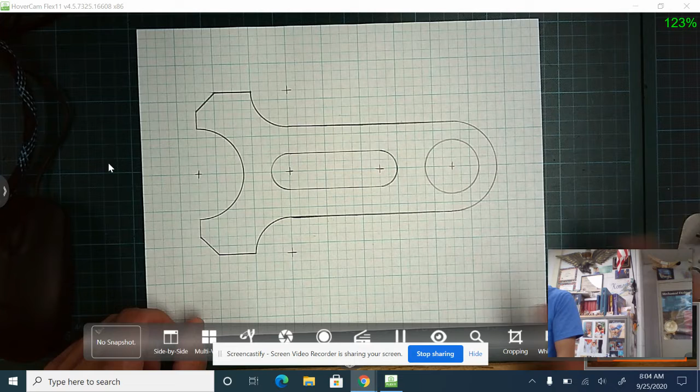Okay, everyone, you can see I have now gone over the part with the gold pencil, so I'm ready to start putting the center lines on and then the dimensions. After you go over with gold pencil, make sure everything's cleaned up. It looks nice, overall this is pretty good. I maybe went over this a little bit too thick here, you can see it's a little bit darker, so I could use my eraser shield and just maybe erase a little off of that. Nothing crazy, but overall we're looking pretty good.

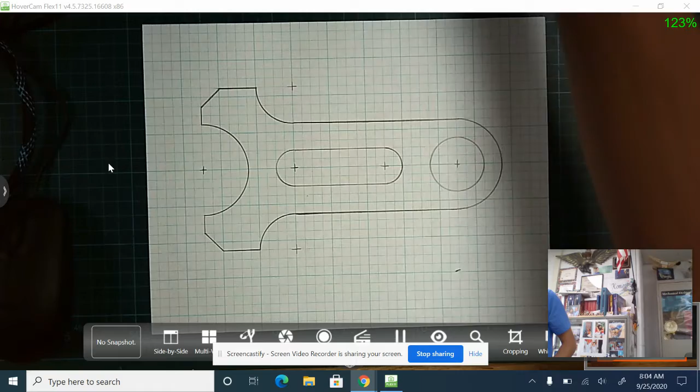Center lines, you're going to use the blue pencil. I'm going to start with the horizontal one. And remember, a center line has dashes in it. It's going to look like this: solid line, little space, and then a little dash.

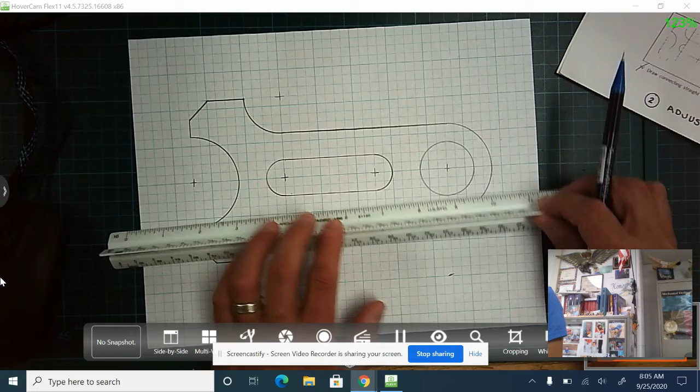So I'll start with the horizontal one. I have all my center marks already in there. It's a blue pencil, I'm not going to connect to the center mark, so leave a little bit of space. And it's kind of up to you where you're going to put the center marks. I'll put one maybe right here, so I'll leave a little center mark there.

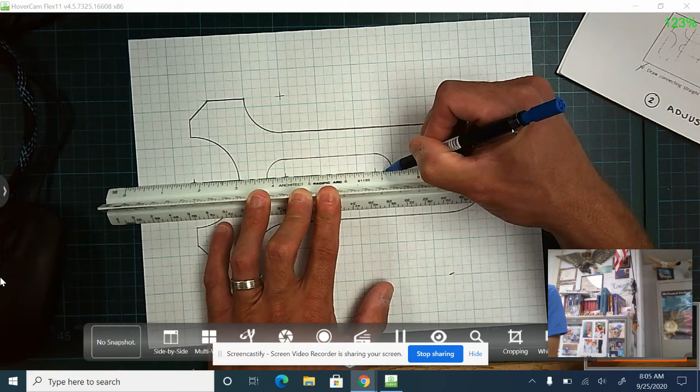Again, don't connect to the center mark. I'm going to put one right here in the middle, and then maybe I'll put one right here. Then I got to move over here a little bit. Next, I'll just go out a half inch, I won't even put one on that side. So there's my center line, I left a few dashes in there.

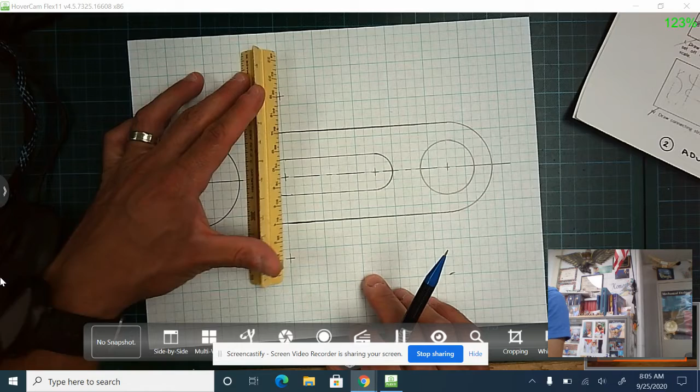Now I got to do the vertical ones. Let's see, I'll put one maybe right here, and then just be consistent. So if you put one here, let's put one on there as well on the bottom, so it's symmetrical. I'll do the same thing here.

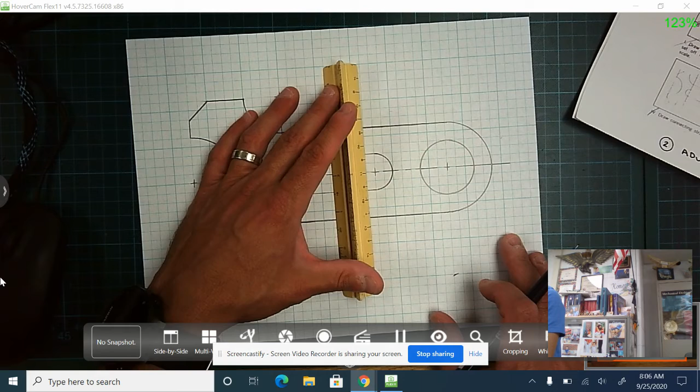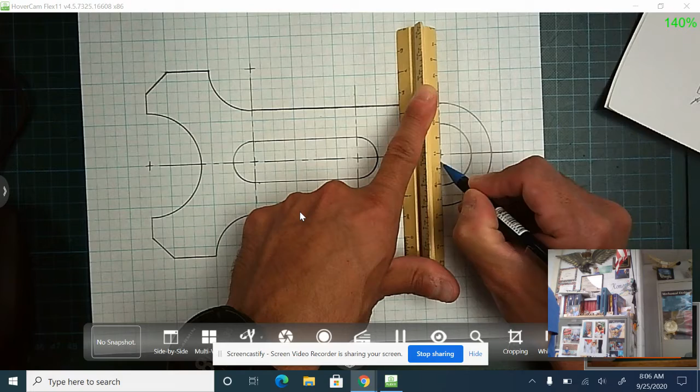Now here I'll go about a half inch outside, center mark right there. Center mark right there, and then a half inch down, a little bit bigger. And then another one over here, so again I'll go a half inch outside. Center mark there, and go down. Center mark right here, and then go down a half inch.

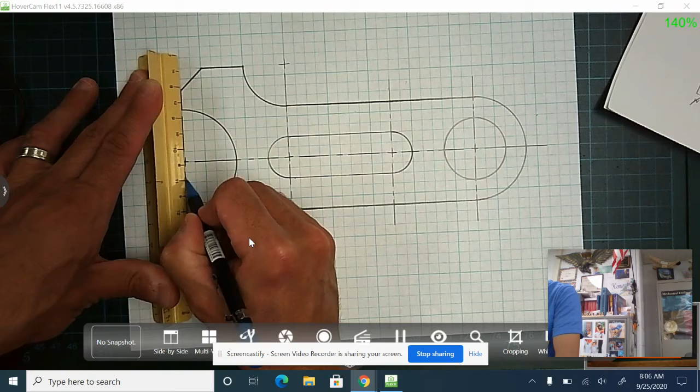Also, I need to fill in these little areas, so I'll do one here, and I won't leave the dashes in there. Don't connect to the corner, leave a little bit of space, and also don't connect to the center mark. So kind of like that, just two lines. And over here, I'll just do one right here in this corner, like that.

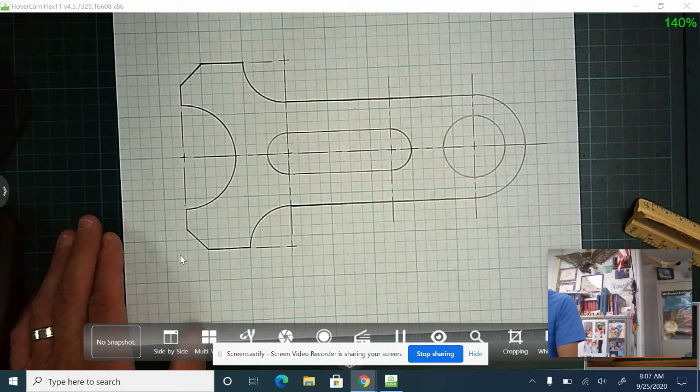And like that. Okay, now that we have the center lines in, we're ready to start dimensioning this. And remember the dimensioning rules: you want to start 3/8 away from a part, and you also want to letter everything 1/8 of an inch.

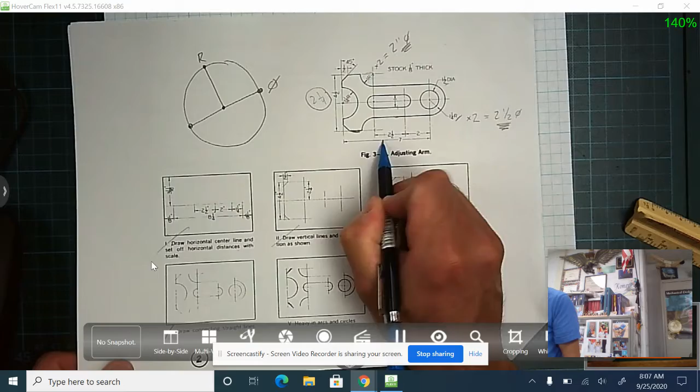All right, so I'm going to start with the 2.5, the 2, and the 7 on the bottom. Again, you're trying to replicate this. So we want to go 3/8 down from right here because that's the bottom of our part, not 3/8 from up here. So 3/8 from there, and then we're going to go another 3/8 for the 7. So that means I have the 2 here, the 2.5 here, and that would be considered the bottom of my part.

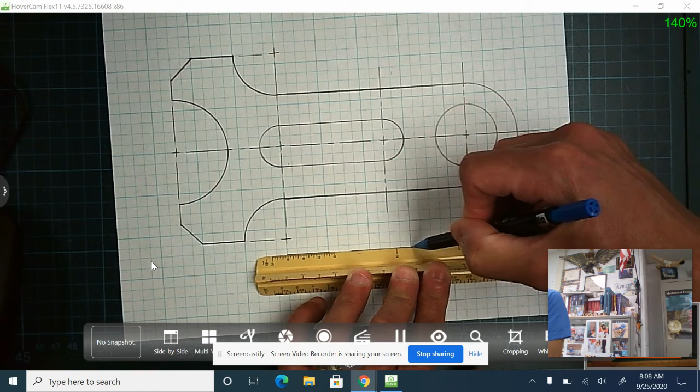So now I need to go down a grid and a half of the next one, and I'm going to draw in my two dimension lines here. So there'll be one here, leave a space in the middle so you can write the dimension, and then one right there. So those will be my two dimension lines.

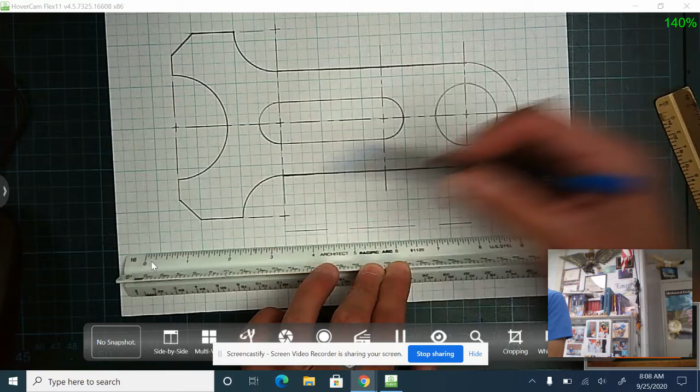Now I have to bring the extension lines down here as well, but I'm going to do the 7 first. So for the 7-inch dimension line, we're going to go down another grid and a half, so that puts me down to here. Now that dimension goes from the center of this hole to the left edge of the part, so the dimension line will start here, leave a space somewhere in the middle, and it will end right there. Okay, so here's my dimension lines.

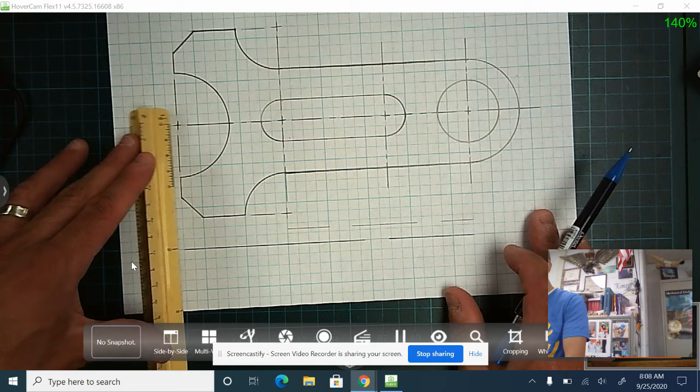Now notice the center lines are there, but we need to add the extension line coming down, also from the corner. So we're going to, don't connect to the corner, leave a space, bring it down. Same thing here, now this one will be really small, you don't want to connect it to the center mark either, so leave a little space, go down. So that's kind of a smaller one, and remember the space that you leave or you take out, you add it to the end.

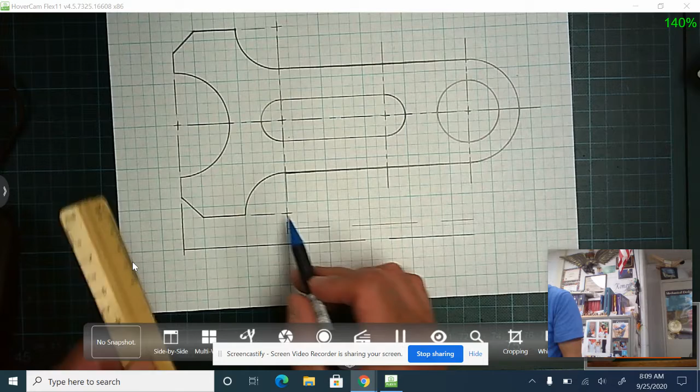Now here, it's okay to connect it to the center mark, so we can actually just extend this line. So this center line is going to kind of blend in and go right into the extension line.

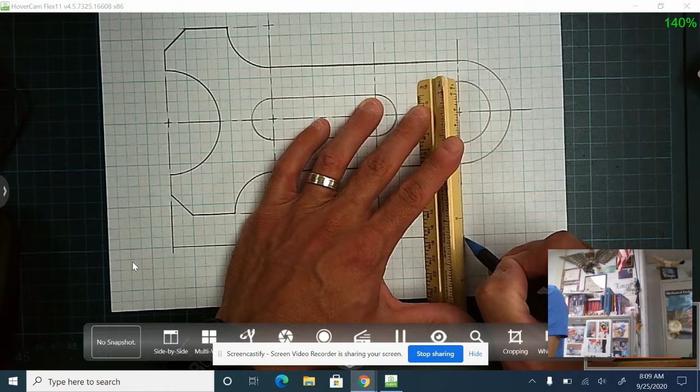Go a little bit past. And then the last one, same thing here. You can connect it to that center line and bring it down a little bit past. Now I can write my dimensions in there.

So this one's going to say 2.5. This one's going to say 2. And this one's going to say 7. Don't forget the arrows. Always double check you got all the arrows on there.

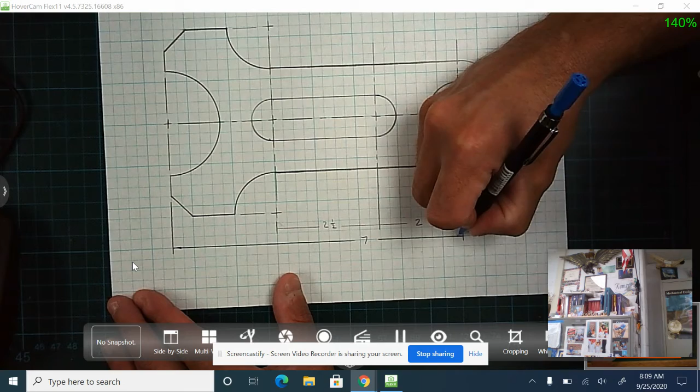Again, back and forth just a few times. Make sure you fill them in. They don't need to be really big or anything.

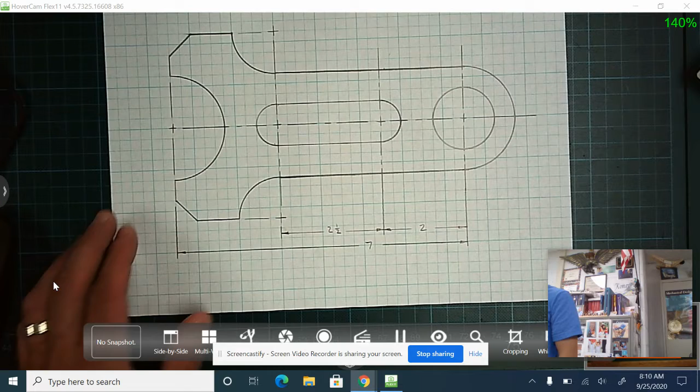All right, so we got our dimensions down there on the bottom. Let's see, we'll do the 1/2 inch, maybe in the 45 up top. So let's do this. We're going to go here.

First, the 1/2 inch dimension is going to go right here, but that dimension line is going to be really short because we still need to leave a little space in the middle. It's really going to just be like that.

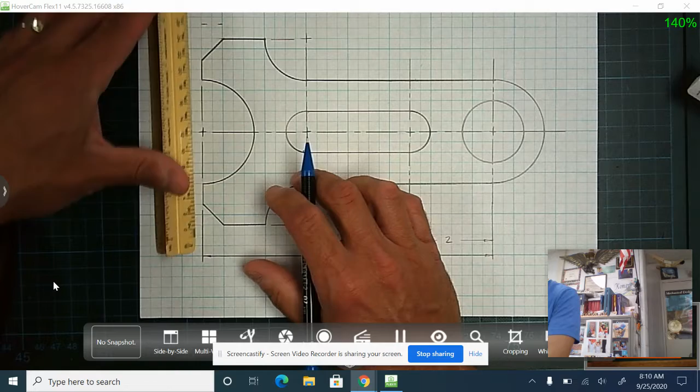Now here I can go, again, don't connect to the corner, go up. Here, don't connect to the corner, just go up a little bit. I'm going to write a 1/2 inch.

And then the arrows, you can even do the arrows on the outside. There's really not going to be enough room here. You can see how the arrows are on the outside there. So that's okay too. We can do this.

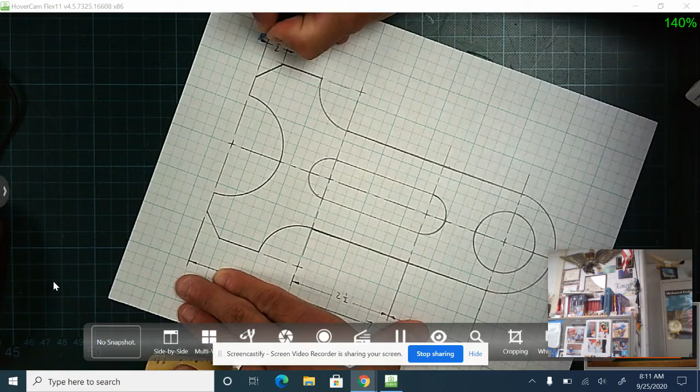So there's my 1/2 inch dimension. And the 45, I'm going to go out this way.

And then from here, I'm going to extend that extension line a little bit further. Maybe a little bit further than that. Okay.

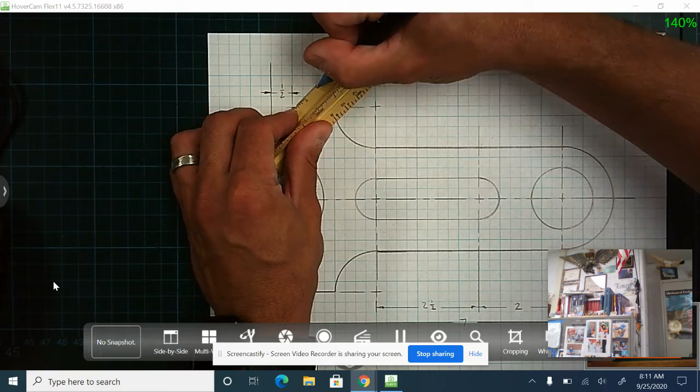I'm going to take one of my circle templates like we did with the last drawing. Yeah, that one looks pretty good. I'm going to use this one. I'm going to leave a space in the middle. Draw the curve, and then I can write in there 45 degrees.

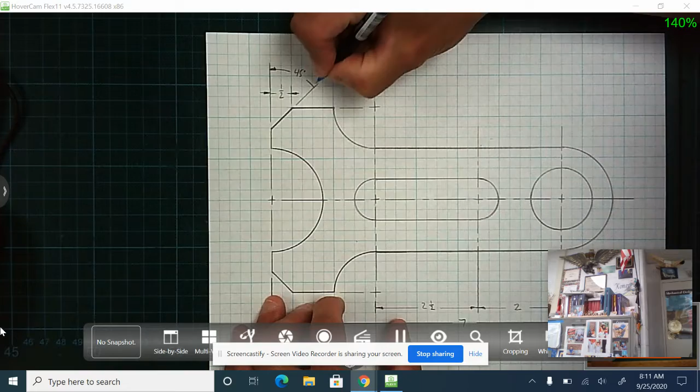All right, so if I was doing, I'm not going to do all of these this time. Like the 4.5 would go on this side. You'd go 3/8 over and do the 4.5 dimension over there. There's a 1 inch dimension here in the middle.

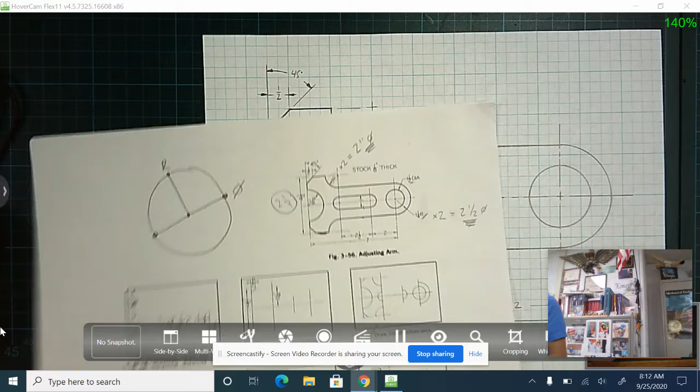I do want to do a couple leader dimensions just because those we haven't done yet. So like if I was doing, I'll do this 1.25 inches and this 1.5 inches. Those are pointing to the circle and the curve.

Those you want to go roughly at about a 45-degree angle. You're going to start at the center mark. You're going to go out, again, roughly 45 degrees. You can kind of eyeball that. And then you're going to go over horizontally just a little bit.

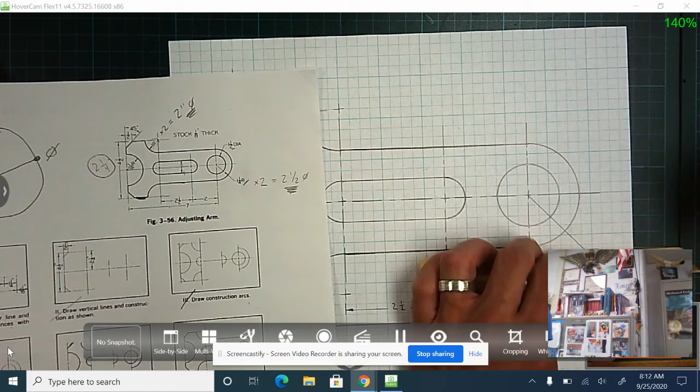Here we can write our dimension in here. It's 1.25 inches radius. And then just pay close attention to where the arrow is pointing. The radius is for this outside curve, so we want the arrow to point on the outside curve.

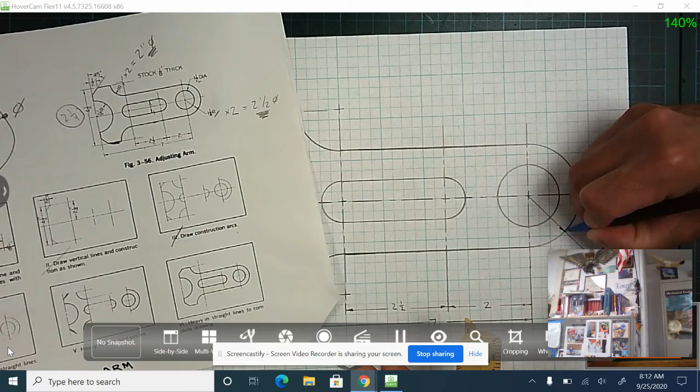Don't put the arrow on this hole or on the center mark. It should always point to the feature that you're dimensioning, in this case, the 1.25 inch radius. The 1.5 inch diameter is for the hole.

So when you start this one, again, go out about 45 degrees. Over to the right just a little bit. We can now write our dimension. So 1.5 inch diameter.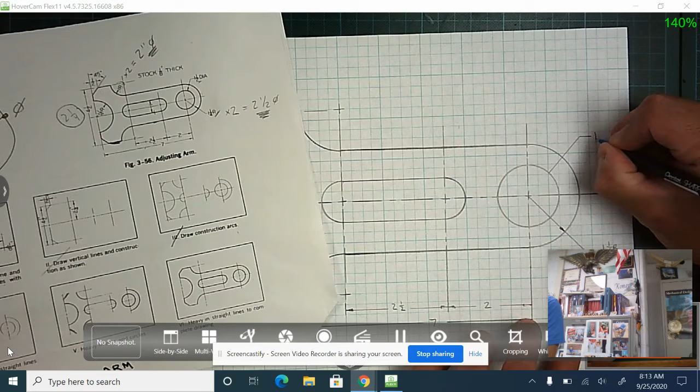Arrow should point to the hole. Okay.

You also notice it says stock 1/8 inch thick. I want you to letter that nice and neat up on the top somewhere. That tells us how thick the part is.

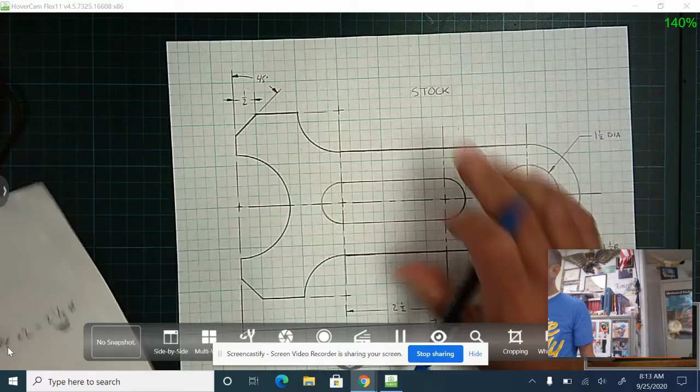So we can't see, is this thing 1 inch thick? Is it a 1/4 inch thick? We don't know. Well, this dimension tells us that it's 1/8 of an inch thick.

So letter that nice and neat with your blue pencil.

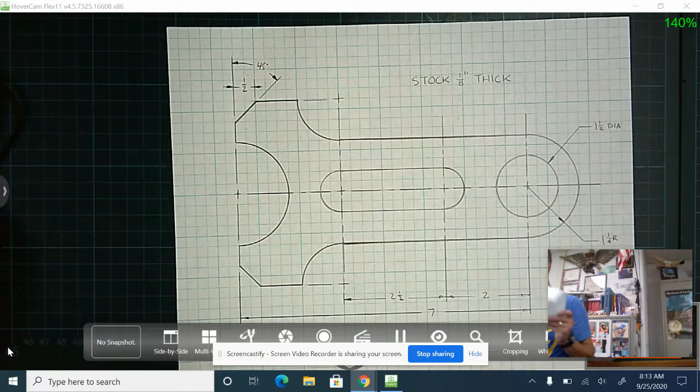And then we're going to letter our name at the bottom, just like we did the last drawing. Your name, Carl Sandburg High School, you can abbreviate it. And then in this case, it's going to be the adjusting arm. So same thing you did on the last drawing. Name, CSHS adjusting arm at the bottom, nice and neat.

I know I didn't do every single dimension on there, but you can take a look at this one. That's what it'll kind of look like when it's done.

All right, so that completes the adjusting arm drawing.